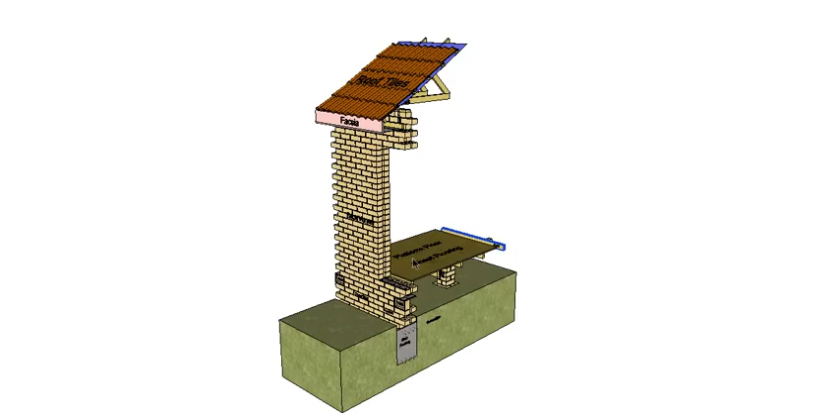We're working through this double brick construction building with timber floor. We've got the roof on, it's all tied in, so now we want to look at how do we finish off this doorway and our platform floor. Well, we've done the platform floor, how do we finish off inside?

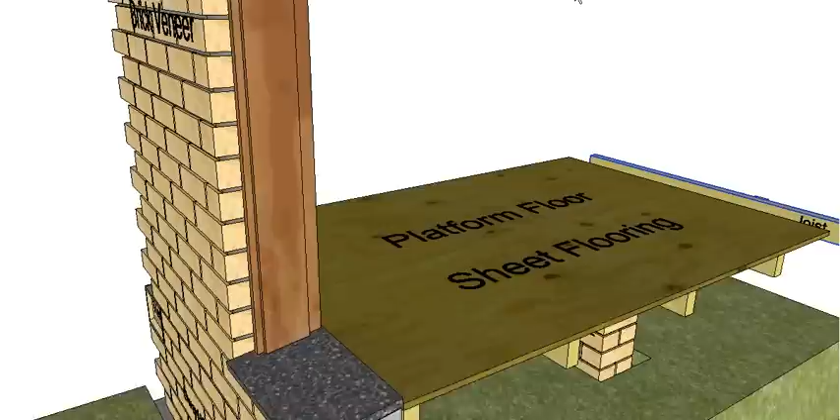So the first thing we're going to do with the doorway is go down and put in our threshold. Now this could be timber, or in this case I've put in terrazzo. This is packed up on mortar. Obviously with timber you'd have to block it and wedge it up. It's on a slope so that all the water will run to the outside of the building. You can then cut our door jamb to fit into that.

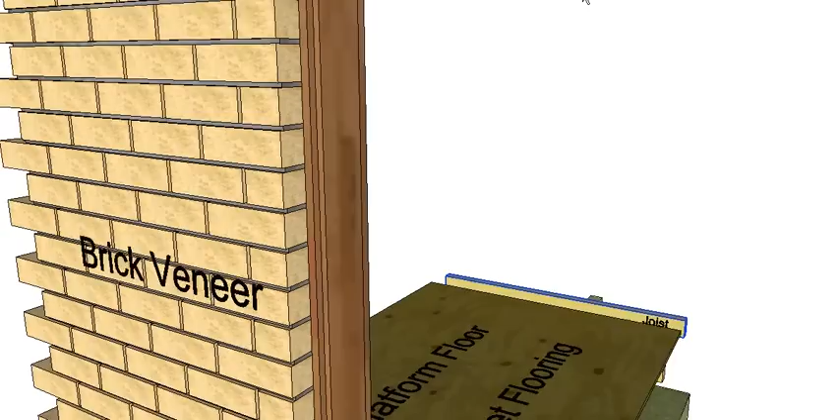As you saw at the bottom, it's cut to fit the threshold, so no gaps, and it finishes just short of our opening at the top. And you'll notice also that it's packed. It's packing in behind the jamb, so it's not sitting hard up against the brickwork. That way, if for some reason our brickwork's out of plumb, we can still get our jamb to be nice and plumb and fit our door.

Now obviously there's a gap here between our arch bar and our jamb, and there's also a gap down this side, so we have to put in moulding to cover that. It's called storm moulding. Quite often they just use a bit of 40 by 20 across the top. They might use a mould, a quad or a scotia or something down the side there just to cover that gap up.

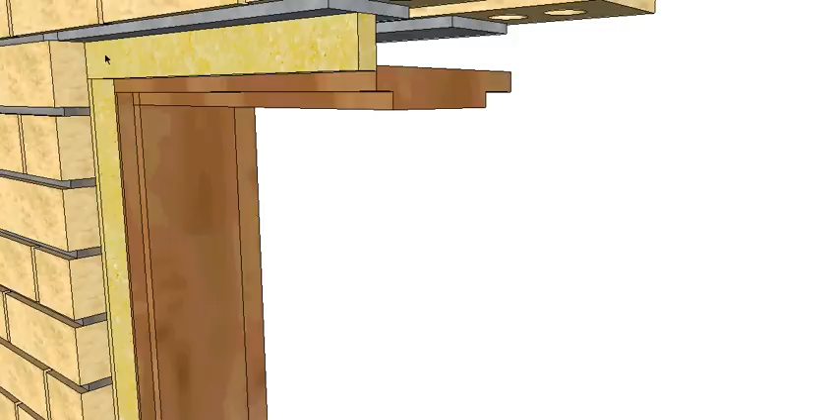It should be hardwood or something that's going to resist weather, because obviously that's going to be exposed to the weather. So it can't just be your normal run-of-the-mill pine or custom wood mouldings. Has to stand up to the weather. So that's covering up the outside.

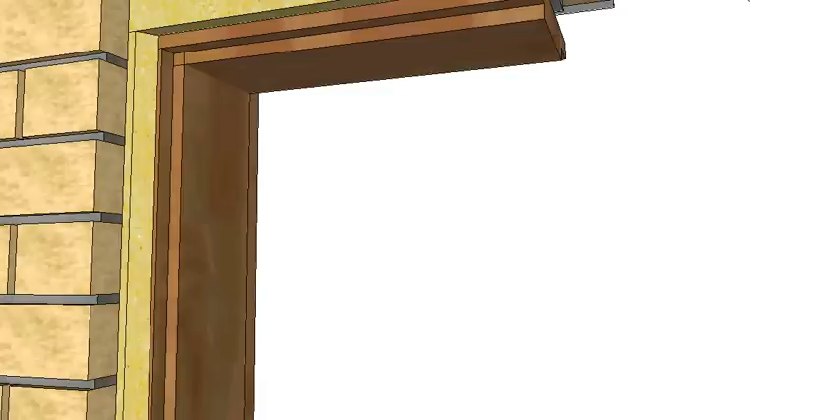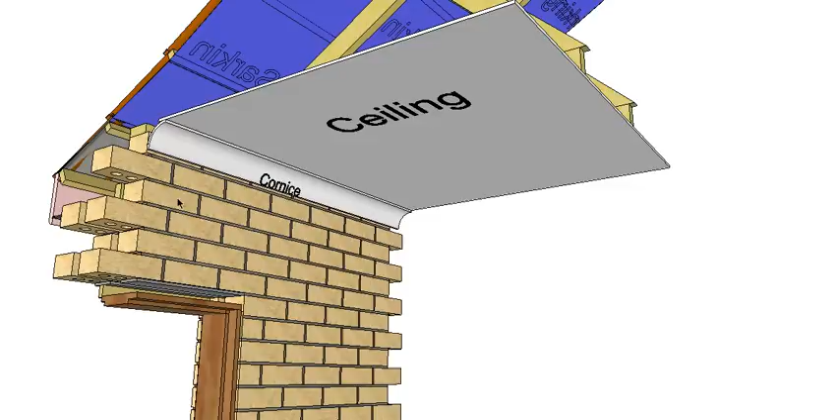On the inside, of course, we're going to have to put in our ceiling, as we have done before. We put in our cornice to cover up where the ribbon plate sat. So that covers that quite well. If you wanted to, you could plaster this wall. Quite often I'll use common bricks to do these walls and cover them with plasterboard. Or you can render it, or you can just leave it as a feature wall. It's really up to you. I'm going to leave it as a feature wall, so my cornice finishes to my brickwork.

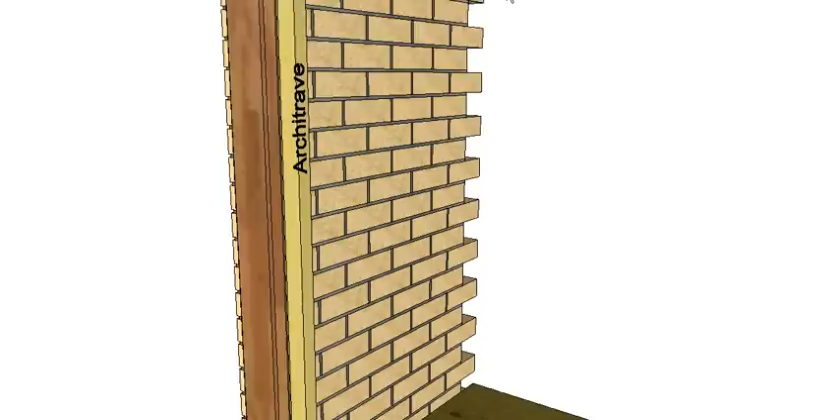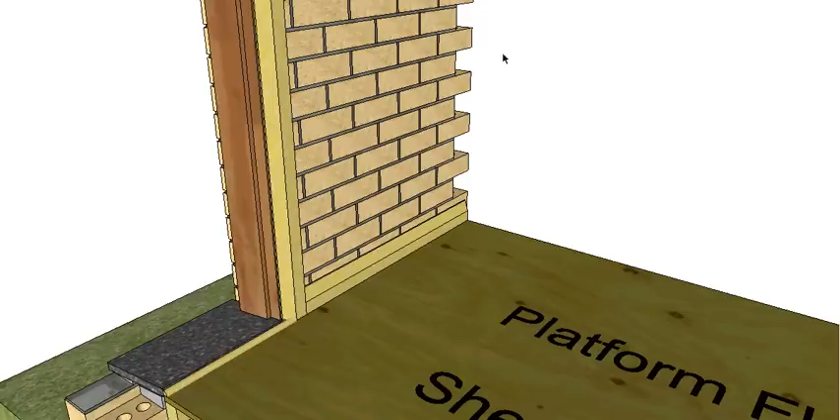We architrave around the door to cover up our arch bar and the gap above the door on the inside. That gets architraved. Obviously there's going to be a gap here between this sheet floor and the brick wall, and there could be a little gap here between our terrazzo threshold. So you need to put some moulding in, so skirting along here and just a little fillet mould to cover that in.

And that's it, we've done our double brick construction building.